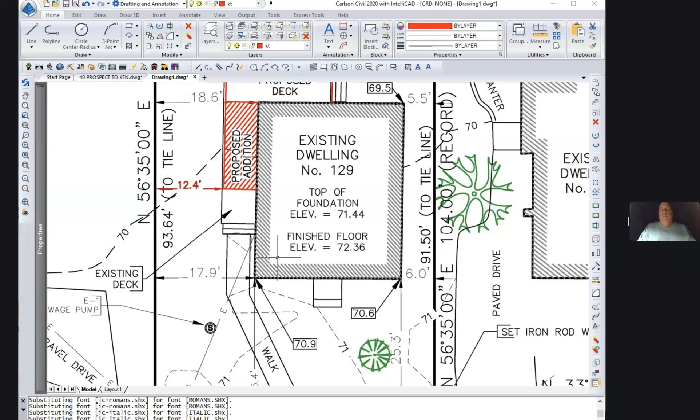So their phone doesn't need to be used. All right, my name's Ken Thompson. I'm the wetland scientist. I'd like to share the screen, John. Yeah, I think you got it. All right, can you see that? We can. Okay, let me zoom out a little bit here.

There's an existing structure on the pond here. The proposal is to remove this portion of the deck and this portion of the deck and replace it with a 16x19 addition, set on 6x6 posts sitting on concrete piers. The area is completely in the floodplain with an elevation of 73.2, something like that. That's really the project. I've got mean high water marked here, and on the west side of this house, there's wetlands extending to the pond, a large part of the main wetland associated with the pond.

So basically, we want to replace a portion of that deck. There's like 70 square feet that will be removed from the existing deck, rebuild this section of deck, and then build this 16 by 19 addition on 3 piers going down here.

I did a little calculation because we're in the floodplain: going from a 4 by 4 to a 6 by 6, we're going to impact less than a half a gallon of water. So I'm calling the flood offset de minimis. I can dig a hole underneath the addition if you'd like. Well, half a gallon would potentially evaporate in a short time with enough surface.

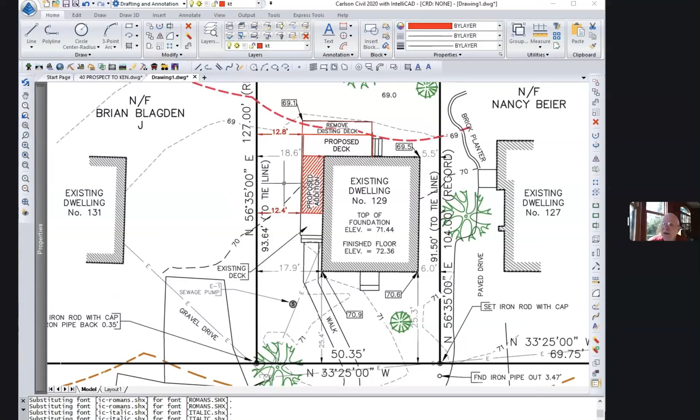But it's not in the floodwaters now, so it's all going to be done in the dry. I assume that's appropriate. Well, I'll let Lisa ask that question about sedimentation control.

All right, so are you ready for questions? Yes, I am. Any questions from anybody on the commission or John?

So I do have a few questions. The deck that's to be removed, is that on a full foundation, or is that on piles as well? It's on piles. Okay, so you're removing them. Did you calculate the square footage of removal of those piles that you're taking out?

Well, that's really the delta, right? The delta is the number of piles, diameter and area of piles coming out versus the new. And that's your flood displacement total, right? You want to take credit for what you're taking out. So what I'd like to see articulated somewhere on the plan, or even in the findings section, is how much is coming out, what is proposed, and what is the elevation of the proposed addition?

It'll be about 72.36 for the first floor elevation. Flood elevation is 73.4. So it'll be about a foot of water in the house during a 100-year event. My understanding is that the building permit will be tied to the first floor elevation, which has to be a foot above flood zone. Do you know if that's true, John Thomas? I think it was, last time I checked. Yeah, so the flood elevation for this property is 73.4, meaning 1 foot above that, so 74.4, would be what the building and floodplain administrator would need to sign off on.

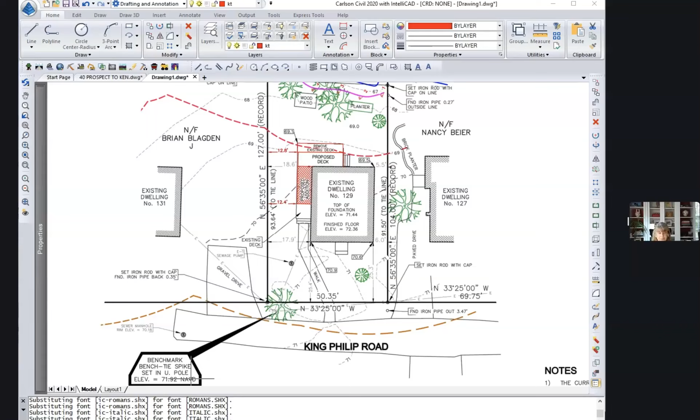Let me unshare this, stop this share here. Can you see that? No? I didn't share quite yet. I gotta share, sorry. There you go.

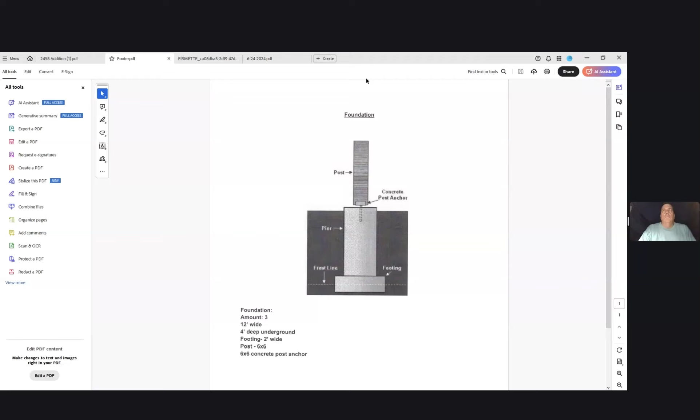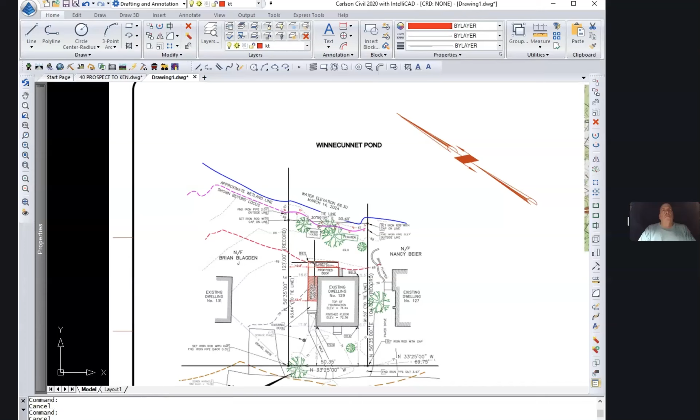I don't know how much we're gonna deal with sediment control. How far away is the wetland? Okay, so yeah, it looks like you will be removing some material to put those posts in, so you probably should have a sediment control barrier.

Oh, absolutely, whatever the commission requests. Right, it needs to be shown on the plan, so it's something you would propose and we would look at to approve. It's definitely appropriate in this situation, so if you could add something to the plan and show us the detail. I don't really think it needs to go on the left there, you're not really protecting anything there. There's wetlands over here, off to the left.

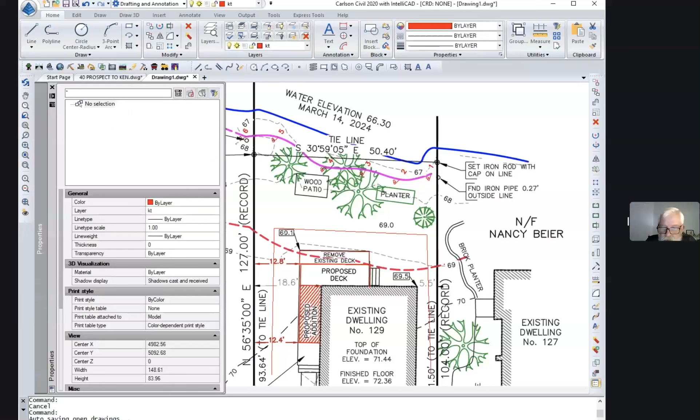I'm just wrapping the area that's gonna be under construction, so I can cut it off here. But basically, I would recommend an 8-inch mulch sock to wrap the area. You just want to give the contractor enough room to work in there so they don't degrade the sediment. Yep, that's all, I can move it out to the property boundaries. So if you could add that to the plan with the detail, that would be great. Okay, that'd be fine.

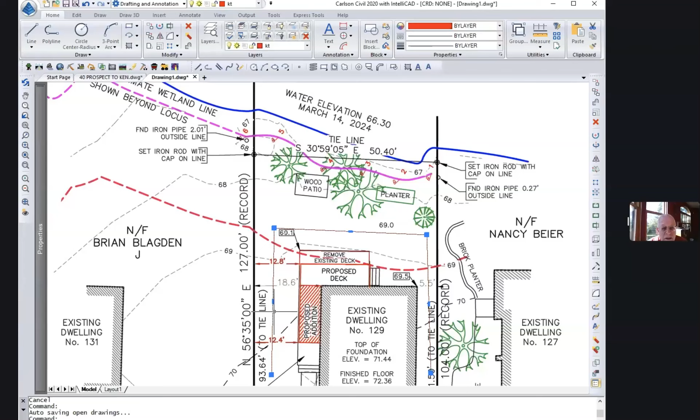I mean, your space is tight, it looks like most of this will just have to be dug by hand with post hole diggers. Well, when we talked about displacement and things like that, it's a series of posts out here that are gonna be replaced in here, so that's equal. The only increase is gonna be these 3 in the center and down in here, so that's the increase.

Right, so we need the delta, going from a 4x4 to a 6x6. So we'll need the total for that for the findings. That'd be fine, I'll get them.

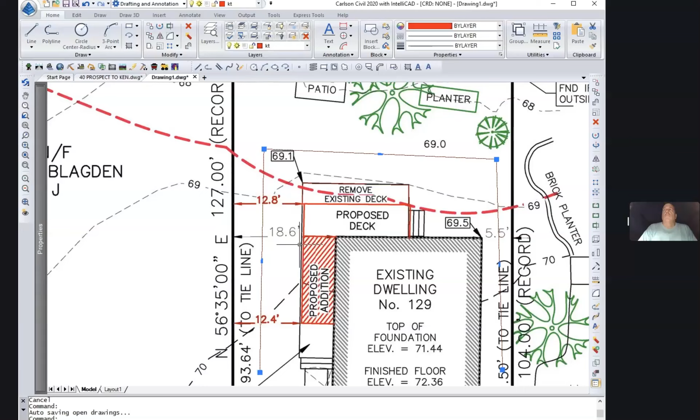And the site looks fairly flat, is that right? It is really flat. Would you like to see a picture of it? We're 33 feet off the high water mark. I'm okay with your drawing, so.

Just, somebody was asking a question. I just couldn't type fast enough.

Okay, thank you. So I think we need to show the elevation of that addition, finished floor elevation, add the sediment control line, add a detail, and give us the impact numbers and then the removal numbers for those posts.

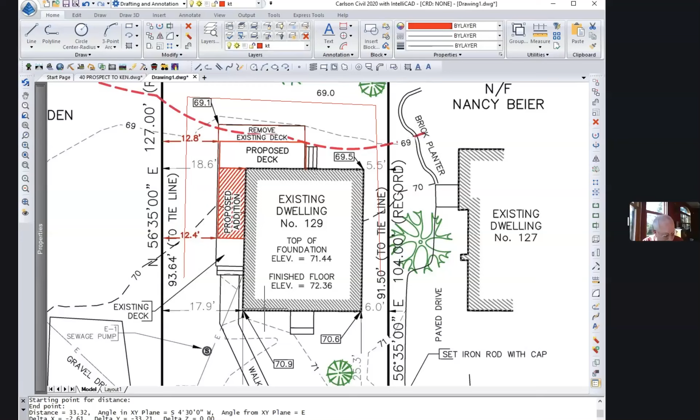Second. We have a motion by Joe, second by Lisa, and a roll call vote. Having a little difficulty with the sunlight here, so we're gonna go with Dan and Joe, how do you vote? Aye. Aye. And Paxton and Lisa? Aye. And Mark? Aye. And I'll throw in an aye. I think I got everybody. So the motion carries.

I don't know if you even have to sign on next time - it's fine, as long as you get the material to John in a timely fashion. When's the next meeting? The next meeting is July 8th. Well, thank you for your time, everybody. You bet. Thank you. Thanks for coming in.

That completes our new public hearings. But our next item is a continued public hearing concerning file number 250-1052, Wading River Estates. This was a request for an amendment, and the amendment relates to a reduced footprint of the project.

I don't know if we can - whoever's presenting it, is it you, Mr. Dunn, who's going to present? If we can share a plan - yes, sir. You have a plan. And this was an item that we went on a site walk for, and at the right time we can comment on our site walk. I think Joe and I were there. Of course, I just closed out the one I wanted.

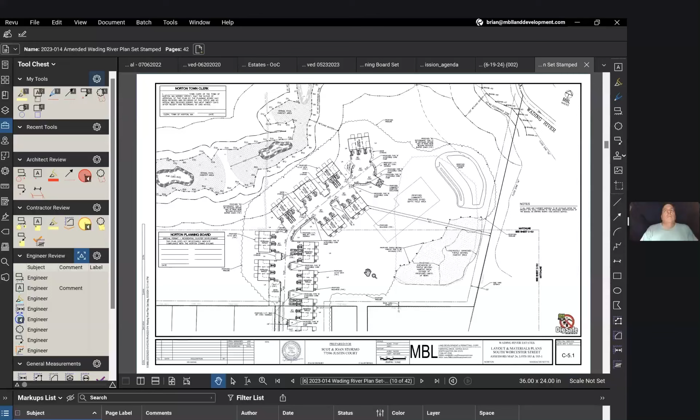Okay, can everybody see this plan now? Yeah, that's it. And then this is the front end of the site. Can everybody see this plan here? Yeah, and one of the things I was impressed with is the size of it. So maybe if you have the figure, what's the total acreage of this site?

Let's see here. Roughly, the total acreage is about 47.38 acres, a majority of which is wetland, 17 acres of it. 30 acres is upland. However, as you remember, Mr. Chairman, during the site walk, the majority of the site work we're proposing is to the front of the site and not even close to the Wading River. And the reduction of this plan even takes us further out of the riverfront area than we were previously when we originally got approved by this board and the planning board.

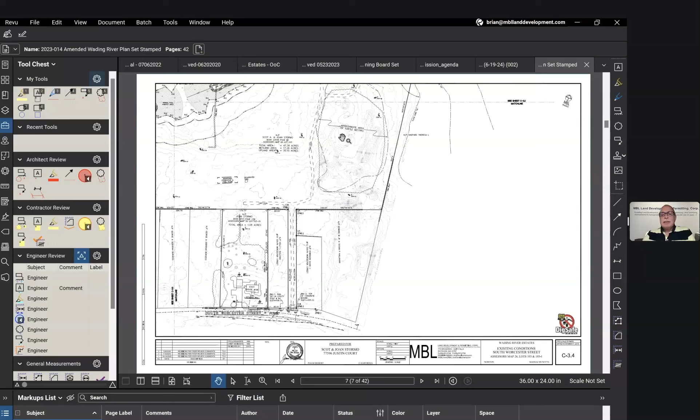So when we did our site walk, we parked here in the driveway, and then walked down through this way along this path. We cut through the turtle nesting area into this area here, and then got a little bit out to the back. Let me go to the next page. And then we got out - well, that's the wrong way, sorry.

And then I got out into this area here, and we could see this is where the paths were that we were on, and we could see these wetland areas, the flags in the distance when we were standing in and around this area. Remember this big mound we were next to? Yeah. So this is approximately how far we got on the site walk.

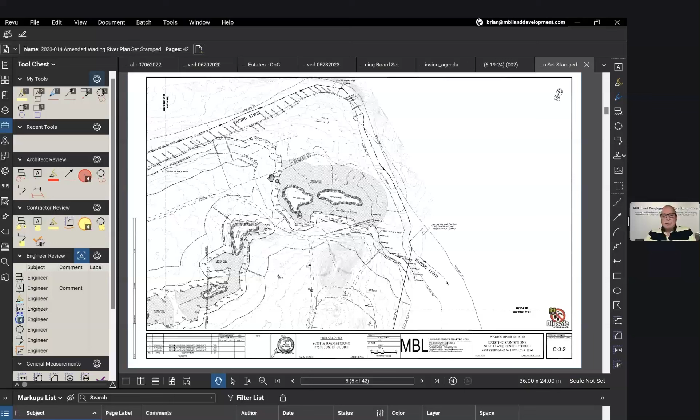So all of this area here to the back of the site is land to remain. We can go to that plan. So you can actually see the overall plan and how much of the limit of work has come in, and where we had work in this area before with the other houses and the driveways going around and so on and so forth. So all of this area here stays undisturbed.

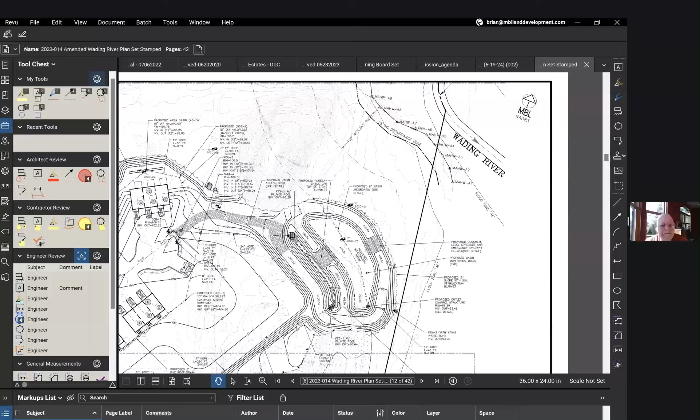So that mound, that rather large mound - yeah, it looks like it's in the undisturbed area. Is that your sense? Let me just double check that. Okay, hold on. Yeah, so this is that mound we were looking at right here. So all of that mound is to stay, is to remain. We're not going to be disturbing it.

So I will just comment that the area designated turtle nesting area, in fact, has turtles, has turtle eggs, and turtle nests. So that is going to be preserved. That is correct, and if you may remember, Mr. Chairman, members of the commission, we've actually increased that area in this revised plan. So I did take pictures of the parts of the shells that were remaining. I did take pictures of the painted turtle that we saw walking around the area.

Going along with your agent's comments and concerns, this is confirmed again with what we did during the site walk, as well as increasing that turtle nesting area. Remember, we are not in a natural heritage area, and we're not required to do all these sweeps, because it's not an endangered species habitat. However, we are making an effort to protect the species' habitat. As you remember walking the site, very sandy conditions out there, ideal for the turtles. Even this basin's bottom is to be sand, based on your previous peer review engineer's comments. So that's going to continue to provide area for these turtles and other animals to come and do what they need to do.

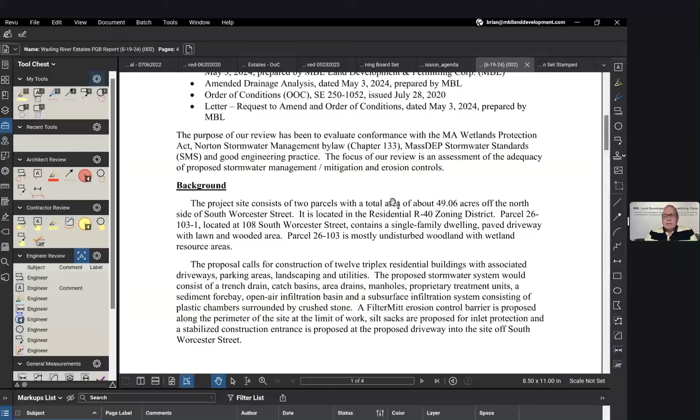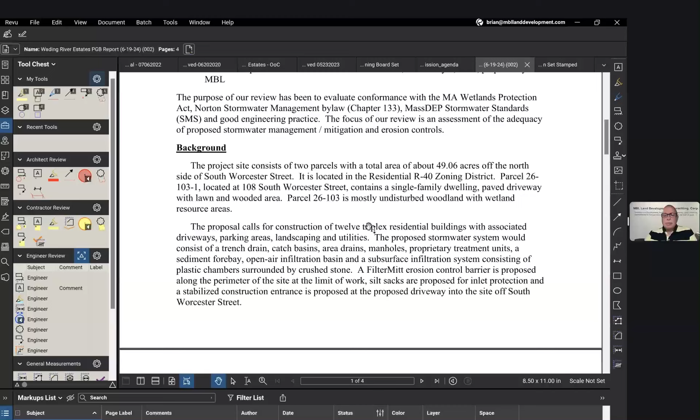All right, Brian, you want to do that, and then we'll open it up to any questions from the audience? Sure. So here's the peer review comment letter or memo that Mr. Brennan had prepared. As you can see, his comments are very minor in nature, because it does call for a reduction in the area of pavement. His peer review was really focused on the stormwater system, water quality, and erosion control. So very minor comments.

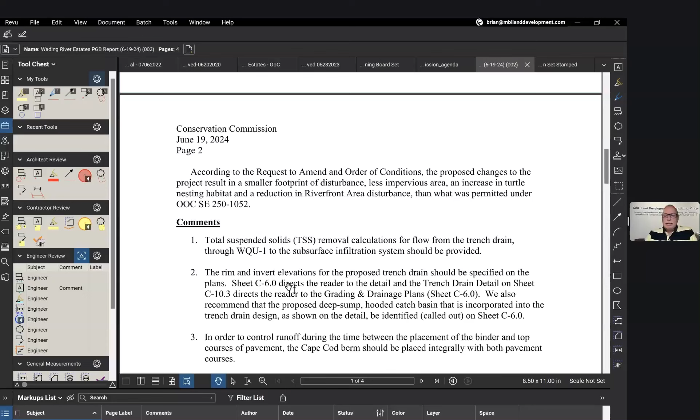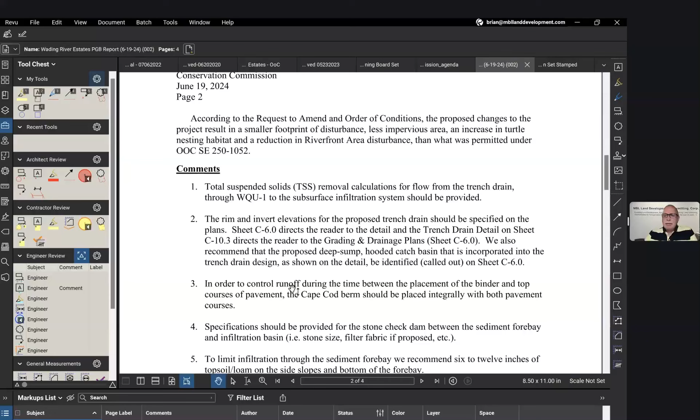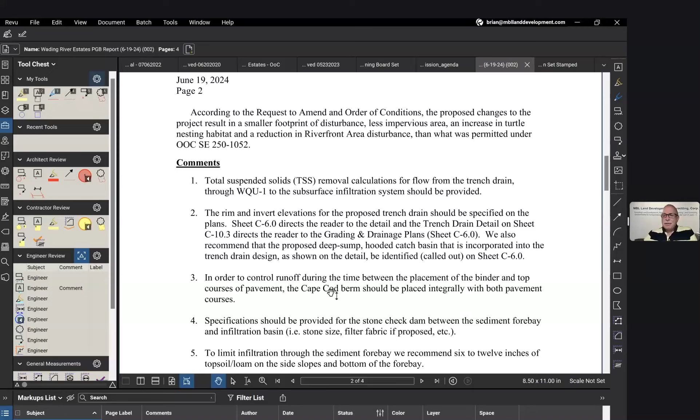Number one, we need to provide him with our detailed TSS removal calculations, which we have no problem doing. Number two is really about the trench drain, and we need to add a catch basin with a sump on it, so that we get a little more TSS removal. Number three, he wants our binder detail to be a monolithic Cape Cod berm, so that when the binder is placed down, half of the Cape Cod berm will be installed as a monolithic pour of the roadway.

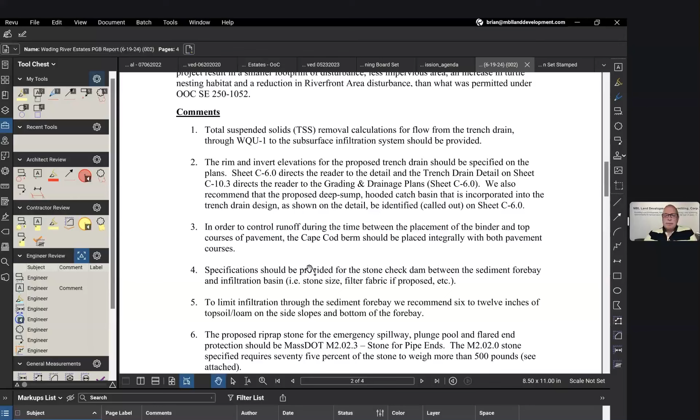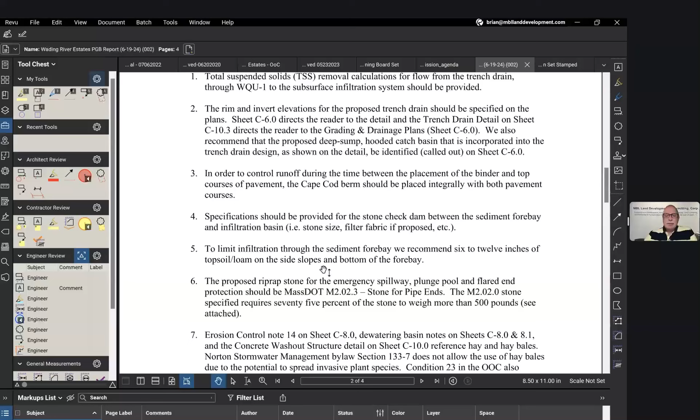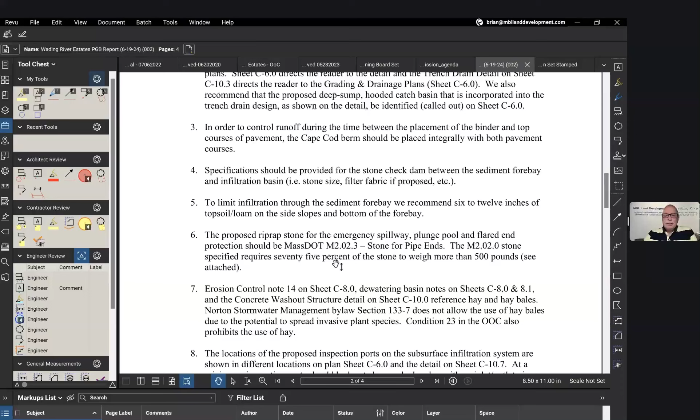Specifications on the sediment forebay - he wanted us to provide that. We don't have a problem with that. To limit infiltration through the sediment forebay, he wants us to change our 4 inches of loam to 6 to 12. We don't have an issue with that. He wants us to call out the Mass DOT specifications for stone riprap pipe ends, which is really the size of the stone in the plunge pool and spillway. Not a big deal.

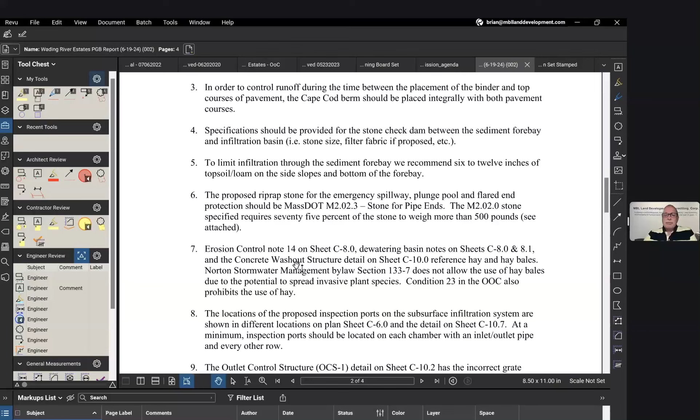Very minor again. Number 7 is erosion control and dewatering notes. He wants us to remove the hay bale section and put in the wattles, because the hay bales sometimes have invasive species in them.

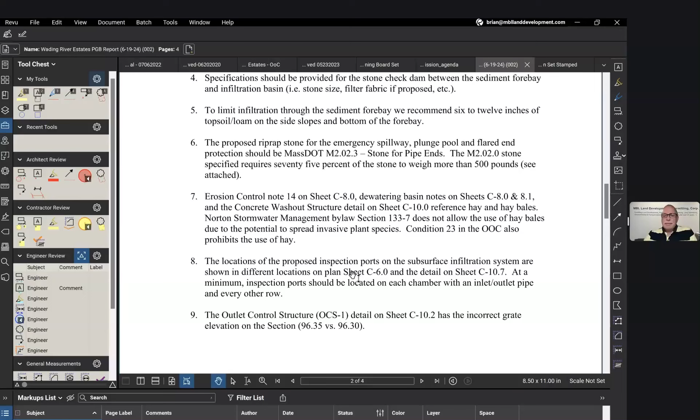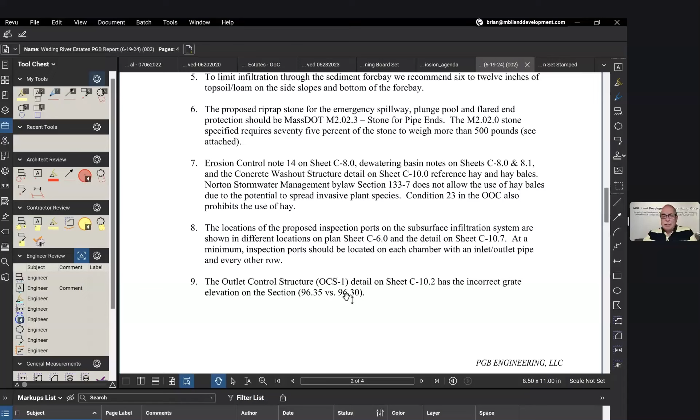Number 8, the location of proposed inspection ports and the subsurface infiltration system are just a little different on the plan versus the detail. Not an issue, we can make that change. Here is his attention to detail - as you can see, the outlet control structure plan on sheet C10 has a 0.05 foot difference. We will correct that. That's why I'm saying attention to detail.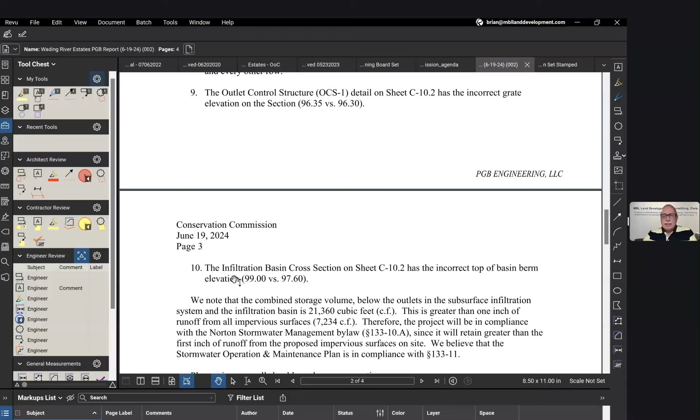And then again, number 10, attention to detail on the differences on the other elevation, which is also a de minimis change to what we've prepared. He did double-check the volume of the basins and concurs with that. Since we have a reduction in the impervious area of the site, he shows that the site is in conformance with the stormwater operation and maintenance plan.

So very minor comments from Mr. Brennan, and we appreciate his attention to detail. We can make those minor changes, and we would respectfully ask that you close the public hearing after you have commentary or anybody in the public who wants to comment, so that we can move on to the planning board with these minor changes in hand, Mr. Chairman.

Okay Julian, before we open it up, I have a couple of questions. Sure, go ahead. So if we go back to the plans that show the area that's going to remain undisturbed, what's going to happen to that property? Is it going into any type of easement or restriction? No, it's just property to remain.

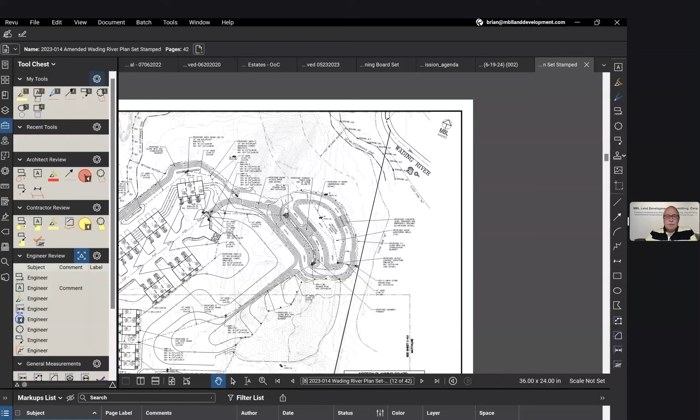It is my understanding that the developer or owners have no intent of going any further. If you notice also, we're up against riverfront buffers. So let's go to that plan.

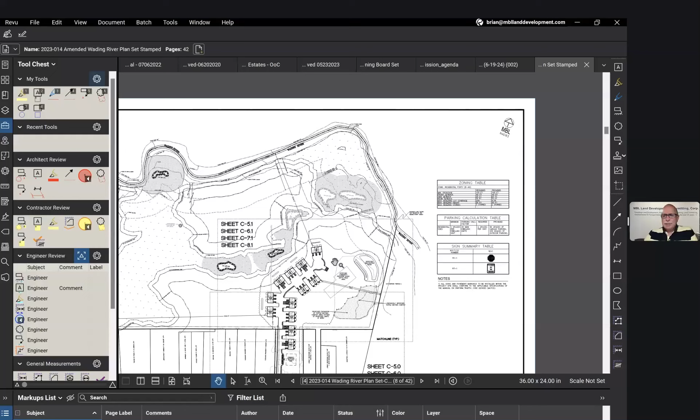So if you look at this plan here, which was part of the ANRAD that you approved, and the original subdivision that was here, if you remember, it was called Strawberry Fields. It was a 40B affordable housing project, and it actually had a roadway that came down here, with houses down in this area.

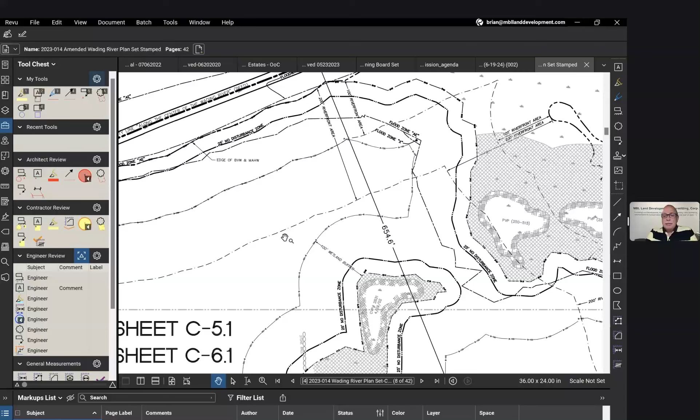We're in the 100-foot buffer zone. You're in the riverfront area. And when you start bringing and putting houses down in that area, we're up against the limitation of 10% of the land area to be altered, and so on. So it makes it more difficult to meet the performance standards and the regulations of the Wetlands Protection Act.

Right, okay, I understand all that. Where I'm going with this is I understand what's in front of us now is what we're looking at and voting on, and that you've scaled it back. I understand that. So if that's going to remain, is it going to be like a condo association or a homeowners association? There's going to be a homeowners association associated with this project, yes.

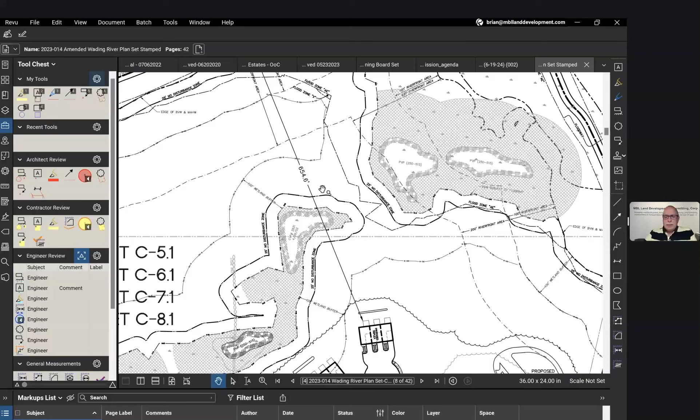And there's an affordable component through Article 16 through the planning board, I think 4 of the units are affordable. But if you remember, this commission issued an order of conditions, and I don't think there was any restrictions placed on this land other than no further alteration past the limit of the work. I'm not looking for a restriction.

So John Thomas, we need to think big picture. How do we, like any other homeowner, prevent people from cutting any vegetation past the limits approved in this order? Are there existing pathways right now to the river? We don't want people cutting on their own. So I think we need to think about reining this in a bit in terms of access, and do we put up some type of barrier somewhere?

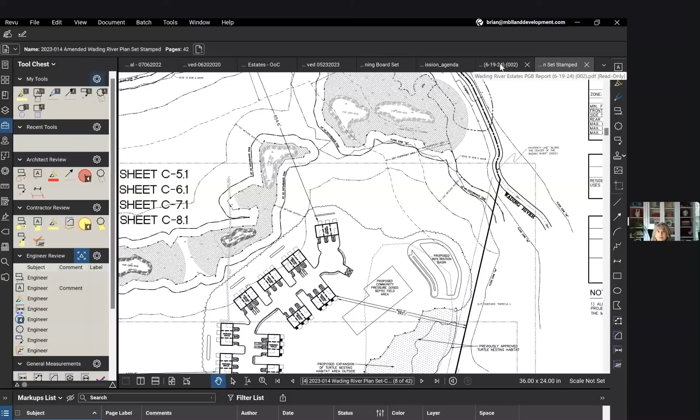I'd have to read through what the original order of conditions had in there, because this is a request for amendment. So I need to take a look to see if there was anything. Not to say we can't add another condition. No, and I know that's correct. So let me just double check to see if there was anything in there originally.

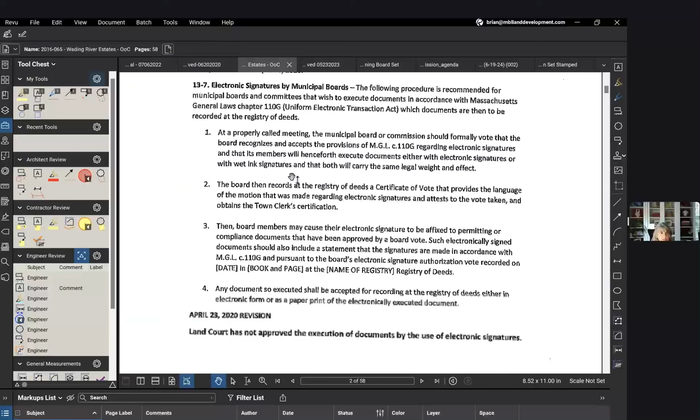Okay, and because there are 10 outstanding comments made by the peer reviewer, I would suggest that we continue this until the plans reflect addressing those comments. That's all I had.

Yeah, Mr. Dunn, you mentioned you want to proceed with planning board, but that simple housekeeping shouldn't really delay your planning board appearance, should it? No, I mean, well, our planning board appearance is tomorrow night, Mr. Chairman. Oh, okay, so it shouldn't matter. I mean, you mentioned that.

I think your peer reviewer, you said the comments are minor, so I don't think if you can just get the corrected set to us, and then we potentially will close next meeting and then even act on the revised amendment at that time. So it shouldn't slow you down at all. Okay.

Any other questions or comments from commission members? And if not, anyone in the meeting want to make a comment or ask a question about this revision of the project?

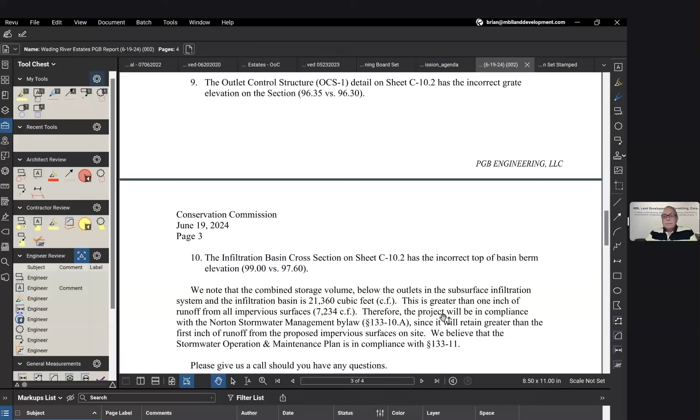All right, I think we're all set for a motion to continue until July 8th. So moved. Second. Clarify, was that Mark who made the motion?

I think that was Joe making the motion, seconded by Mark. Roll call vote: Joe? Aye. Lisa? Aye. Dan? Aye. Mark? Aye. Paxton? Aye. I'll throw in an aye, and the motion carried.

So, Mr. Dunn, I don't know if you have to participate in the meeting of the 8th. If everything is all set, we would go over it and then close. I'll plan on being at the meeting on the 8th just to make sure, Mr. Chairman. You bet. Okay, thank you very much, everybody, for your time. Appreciate it. You bet. Thank you.

Yes, you're welcome. Bye now, guys, ladies, bye. So now that completes our public hearings. We now have a whole collection of orders of conditions.

Can I make a request before we review? We received word that there's 14 Guy Street here tonight for new business, along with the 92 East Main Street project. I don't think they want to sit for an hour as we discuss these orders, so if we could just bump them up, that would be great. Let's take them now. Yep.

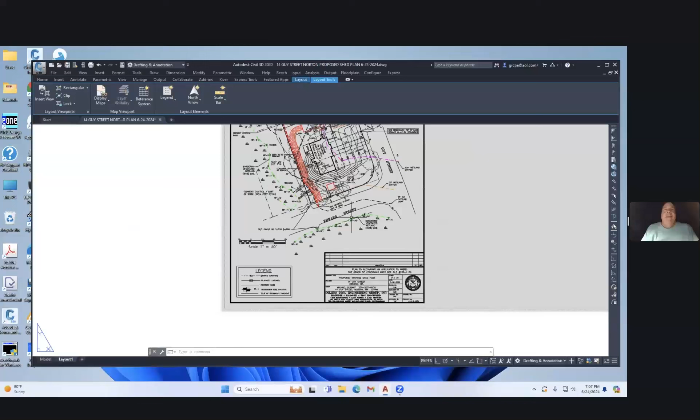I can show you the plan really quickly if you like, and that will be helpful. Yeah, if you could show us the plan, that would be great. I'll share the screen. And I'm going to bring up the plan. Can everybody see the plan? Yeah, maybe if you could bring it up, yes, that looks good.

So what's in red is going to be the amendment, or actually a new NOI. You can see this gray line here - this is on the original order of conditions for the erosion control. So we're going to be outside in the pre-disturbed lawn area here and here. I did talk to the building inspector, he has no problem with accessing a stone drive out to Edward Street and putting in this new proposed 18 by 30. This existing shed here would be moved over here. So everything in red is basically what we'd like to do, and it will involve working outside the existing limited work area on the order of conditions.

And you're getting much closer to the 25-foot line than with the previous project. So I guess it comes down to a direction in which we should file this - a new NOI or an amendment to the existing order.

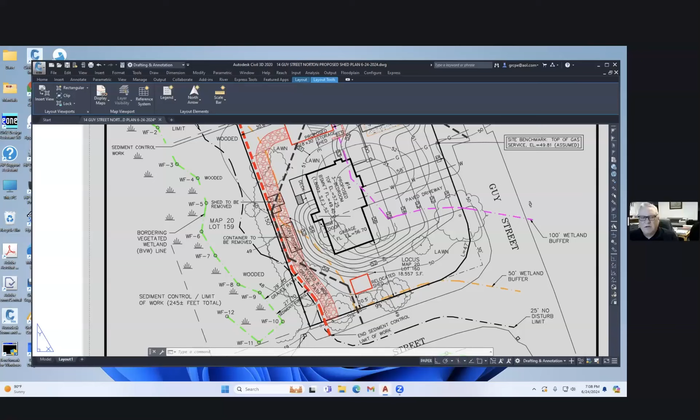What's the timing on the work? Has the other part of this already been performed? They're still constructing the house and the septic system - this was approved less than a month ago. So are you going to do it following the septic system work, or right on the heels of it? If we did the amendment, we would do it congruently with the rest of the construction of the site.

Typically DEP's position is they only want to see one file number per site if you can help it. And to me, the litmus test is, do we need to add any conditions to the existing order to cover this extra work? If the answer to that is yes, then it's screaming for an amended order. And the one thing that strikes me here is you're going to have a gravel driveway.

But, I mean, you're chewing up the whole rest of the site. There's nothing left to it after that in the buffer zone. You're basically occupying every inch of the buffer with something. So I do think it warrants an amended order.

In lieu of another filing, especially if you're going to do it in a timely manner, your opinion would be that this would file under an amendment or a new NOI? An amendment. That's just my opinion, I'm only one person though. I was confused on which way.

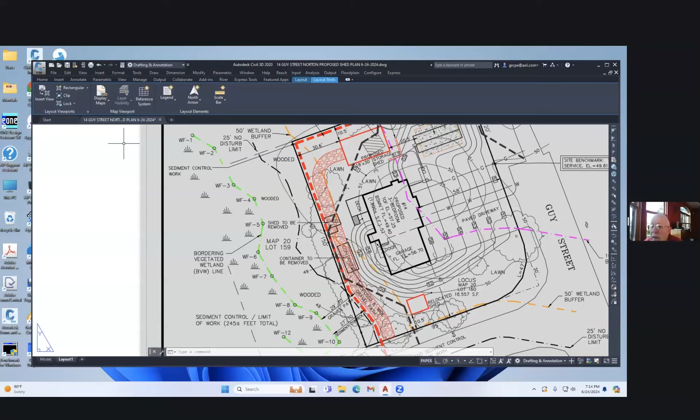And 92 East Main Street, who's going to comment on that and describe what's going on there?

Good evening, members of the commission. Brad Holmes from Environmental Consulting & Restoration, here on behalf of Joe Correnti, who's here as well, for 92 East Main Street. We did submit a request for determination of applicability for a tight tank to handle floor drains at the property, which will be coming in front of you the next meeting or so.

But this pertains to the placement of asphalt millings over the parking area, the back of the lot. I did get a chance to meet with John Thomas and our crew on Thursday and go over the site conditions somewhat and the tasks that are at hand that need to be evaluated and then brought back to the commission.

So the purpose of our discussion tonight is just to tell you that we're working towards it. We're looking forward to respond to the commission and bring back a proposal that's either alternative A or alternative B that is submitted to the commission.

What we're looking to do is, if we restore the area to what it was previously prior to the placement of the asphalt millings, we would look to handle that under an enforcement order with the commission, hopefully a friendly enforcement order. If we were to modify or keep or revise the milling area to something different than what existed previously, we wouldn't be able to do that under an enforcement order. We'd have to prepare and submit a notice of intent. So that is what we would do.